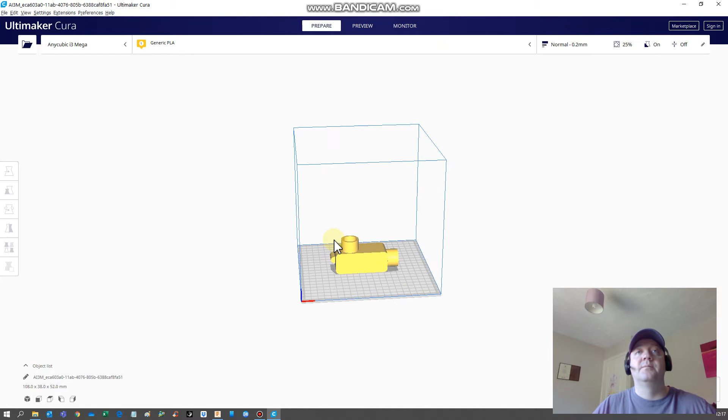So here's that model that I just sent in from Fusion. Yeah, so that's just the model. Oh, there we go. Yeah, so that was the conduit. I just sent it and it's put it on the print bed. This kind of box is the print space.

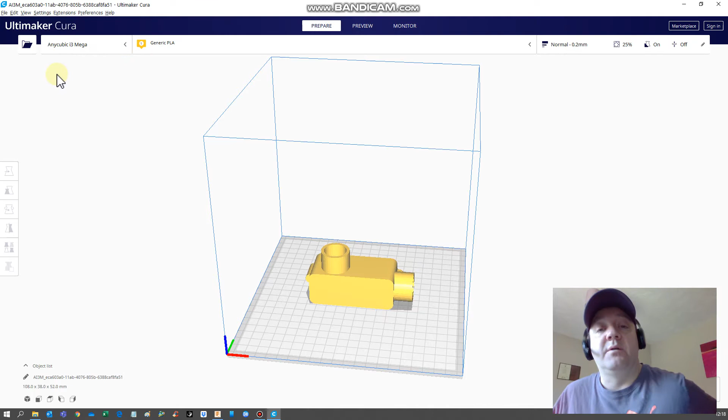You can see here I've selected Anycubic i3 Mega, which is probably the printer that I'll buy. I think it's about 250 quid. It's a decent printer for the price, and it'll do what I want to do. As you can see, the print space isn't that big, which means I'm going to have to print out in chunks and then glue everything together. But that's fine to suffice.

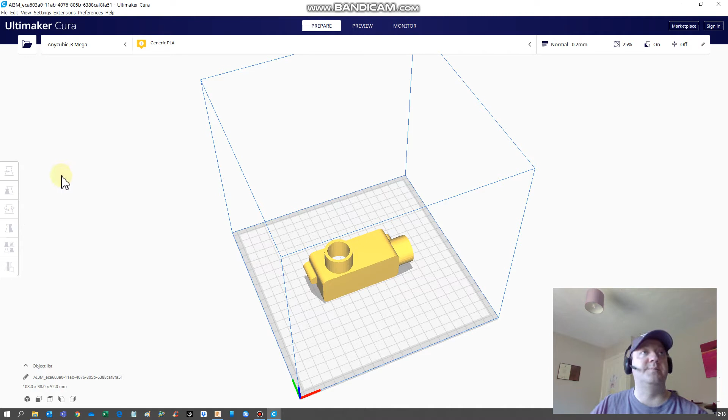Yeah, so that's how easy it is, you just slice it, and as long as the printer's set up, print and it'll print it. It really isn't that hard. Setting the printer up is really just making sure the print bed's flat, that's really it. Making sure your temperatures for the extruder, the part that melts the plastic, is right as well, and that's it. It's easy, unbelievably easy.

I thought after I'd done it the first time, I was like, not quite sure why I thought it was going to be a lot more technical etc. But it's not, it's really easy. So yeah, that's the 3D print part.

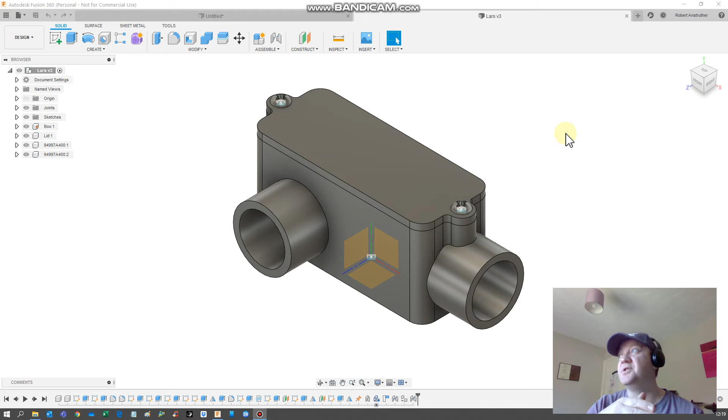So I've had some problems already when I've been doing this. One has been copy and pasting, so you can copy and paste, but I've had a few problems because what you really need to do is create your different planes to paste onto. You can copy and paste and just move a part or a sketch, but it always retains the reference points from the original sketch because that's where it was created from.

But if you create a new plane, for example, and copy the sketch, paste it onto the new plane, you don't have the problem because the origin or reference points are within that plane. So that was a problem I had, which I've solved, which did drive me crazy, and it will drive you crazy as well.

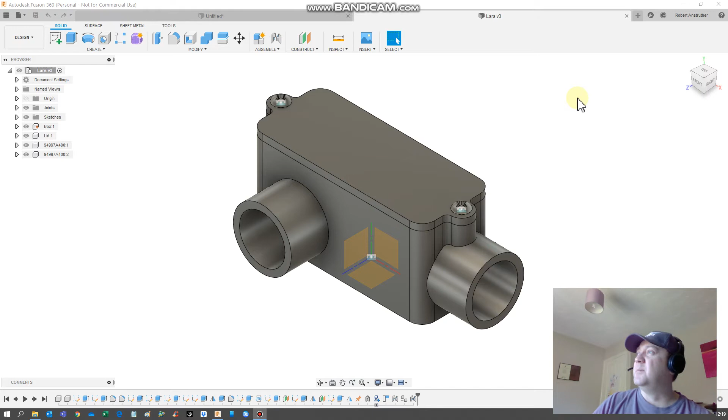Scaling, yeah, taking parts and scaling them. When I was doing the fuselage, for example, I wanted to take a profile and scale it down, like 5% as it went down, and I had problems with that too. Similar to the copy and paste problems, it was reference points and things. However, I think I've got a decent method for that now, and I'll cover that in the fuselage video.

Thinking ahead is definitely a good thing. You really need to think of what you want to do in the end. I've talked about the rollback.

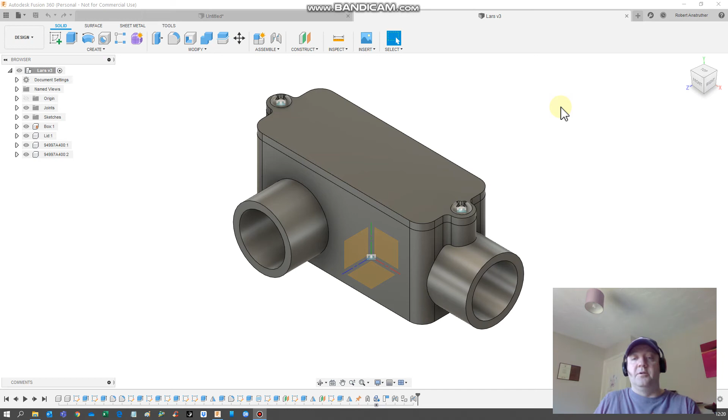Yeah, so I'm going to talk now, I'm going to show you something else. So this is something that I really like. I'm going to show you the Fusion app, which you can put on your smartphone.

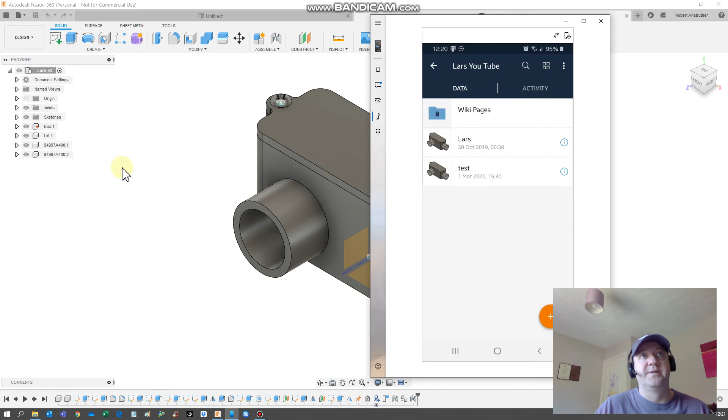So basically, what the app lets you do is go in and look at all your data, just as this is an exact copy of the stuff that's in here. I'm going to go into my Lars one. This is a mirror of my phone here, just on my computer, so you can see it.

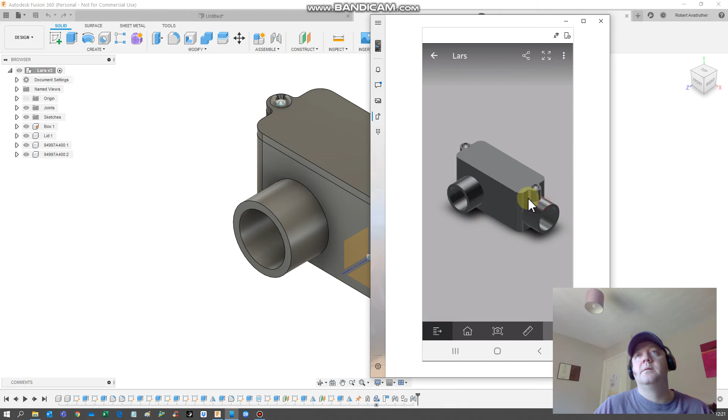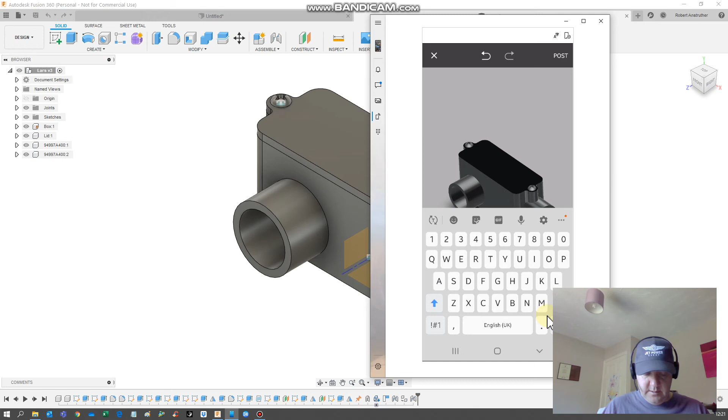So there you go, now what you can do in here... oops, that didn't work. So I need to check. Okay, post that. Now if I open the comments up in Fusion, so this is now in Fusion, you can see that's been added to it. It's not spelled very well, but it's been added.

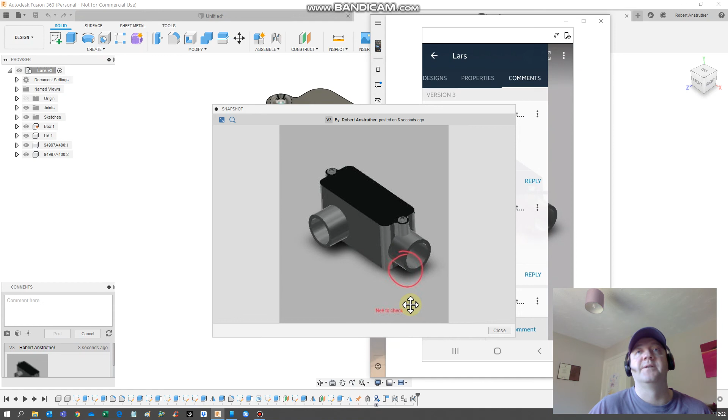So why I like this is because if you're lying in bed at night, or waiting, picking the kids up or something, and you're just thinking of stuff, you can jot things down on the model. You can check things, put ideas on there. I really love it, because sometimes at night when I'm going to bed and thinking, wonder how I'm going to do this, or should I try this or try that, it just helps infinitely with your concepts and ideas. So yeah, I thought that was really good.

Yeah, so the last part really is we're not looking for 100%. That's the main thing here. We're not looking for a model which is absolutely 100%, so you can give and take on bits and pieces here and there. But anyway, that was my kind of how I've selected or got to the selection of Fusion.